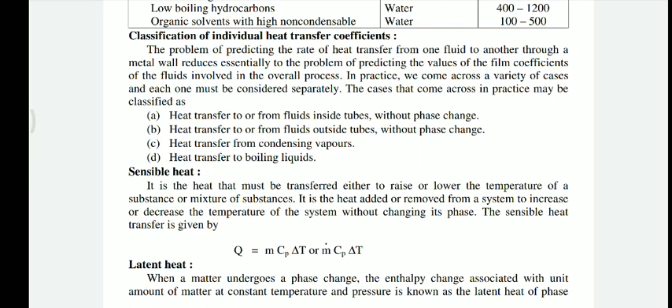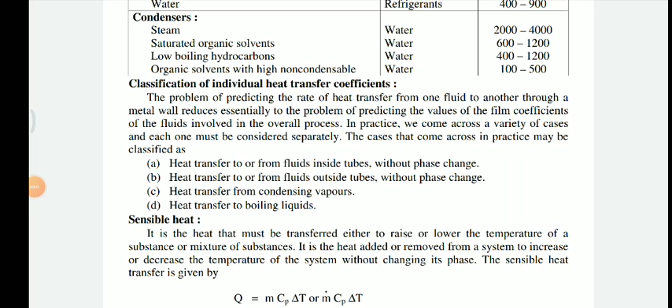In the previous lecture of heat transfer, we discussed the classification of individual heat transfer coefficients. They are classified as: heat transfer to or from fluid inside a tube without phase change, heat transfer to or from fluid flowing outside a tube without phase change, heat transfer from condensing vapors, and heat transfer to boiling liquids.

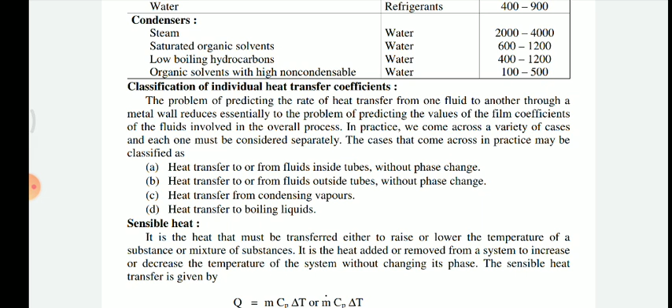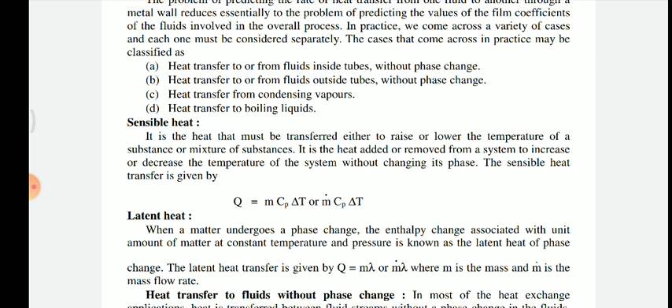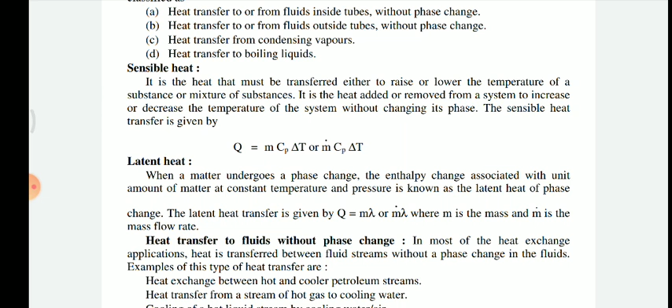It is heat added or removed from a system to increase or decrease the temperature of the system without changing its phase. It is one type of process where heat is supplied either to increase or decrease temperature without phase change, meaning the process or component does not undergo a phase change.

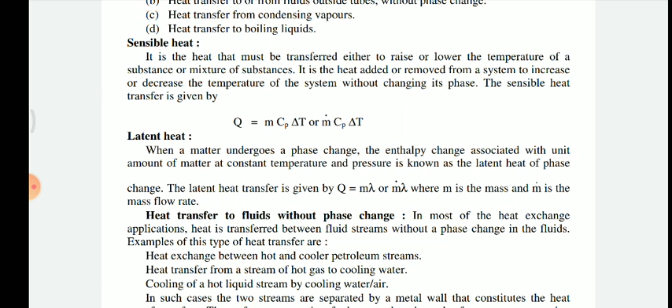So the sensible heat transfer is given by: Q equals m Cp delta T, or Q equals m dot Cp delta T, where sensible heat can be written as mCp delta T.

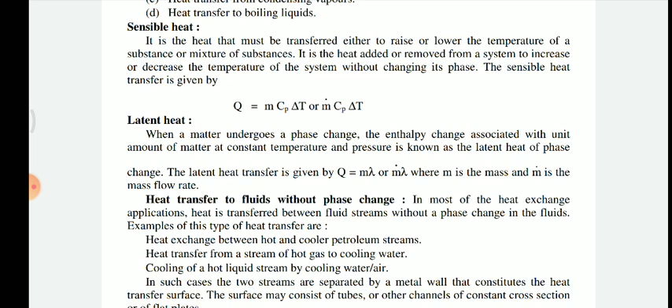And the latent heat transfer is given by Q equals m lambda, or Q equals m dot lambda, where m indicates the mass and m dot indicates the mass flow rate.

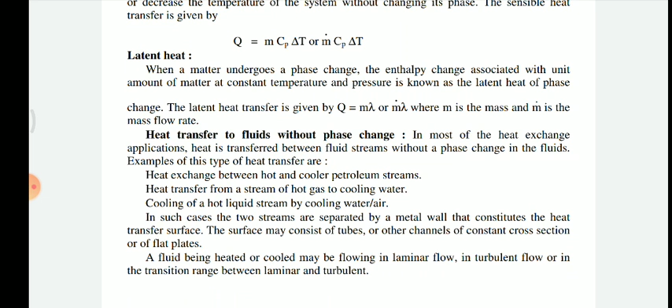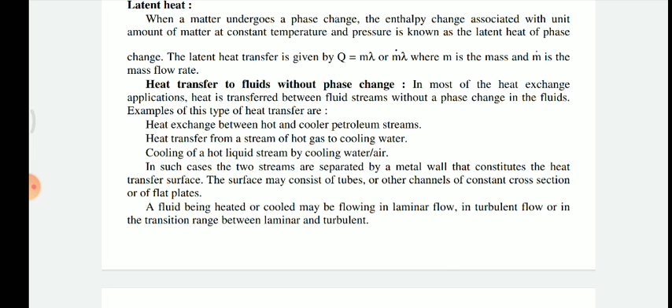Next is heat transfer to fluid without phase change. In most heat exchanger applications, heat is transferred between fluid streams without a phase change in the fluid. In most heat exchangers, the heat transfer occurring is without phase change - for example with water or liquid, at the end of the process it remains in the form of liquid only. It does not convert to gaseous form; if it is liquid, it remains liquid.

The example of this type of heat transfer: in most heat exchanger applications, heat is transferred between fluid streams without a phase change occurring between the fluid streams. Examples of these types of heat transfer are: first, heat exchange between hot and cooler petroleum streams - the heat transfer occurring between hot and cold petroleum streams happens in this way.

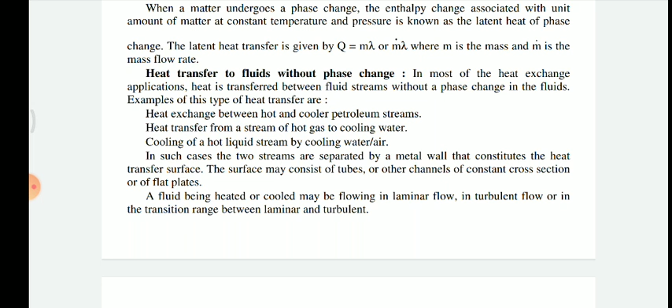Then, heat transfer from a stream of hot gas to cooling water - when heat transfer occurs into the cooling water.

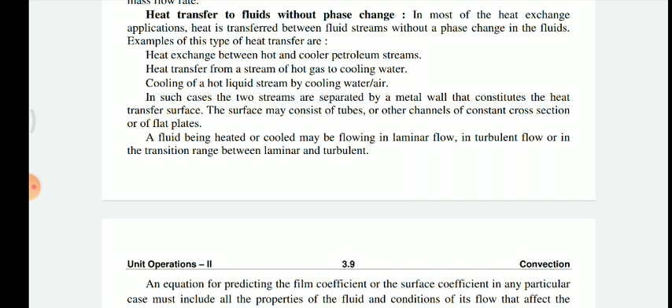So the second type is heat transfer from a stream of hot gas to cooling water. In such cases, the two streams are separated by a metal wall that constitutes the heat transfer surface.

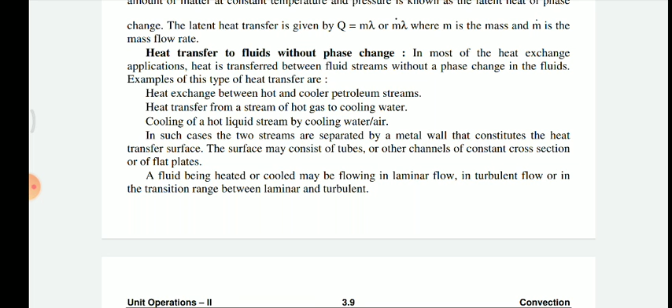Or other channel of constant cross section, or a flat plate. So a fluid being heated or cooled may be flowing in laminar or turbulent flow, or in the transition range between laminar and turbulent.

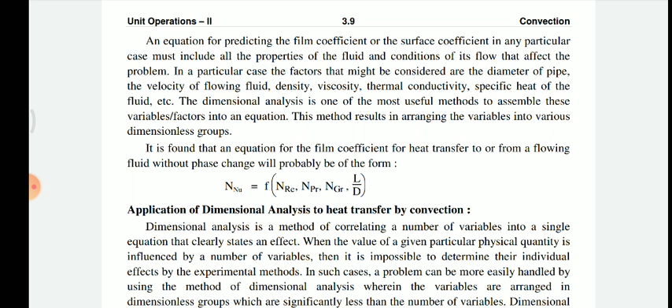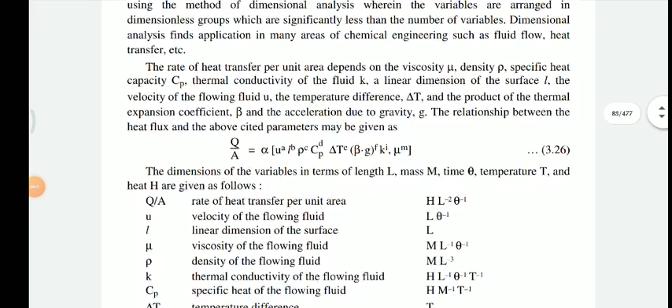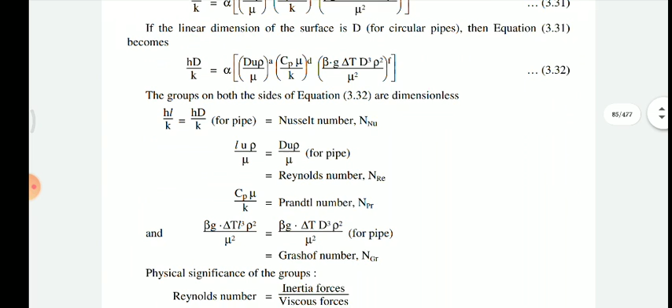Nusselt number is given here as HL by K, is equal to HD by K for a pipe, is equal to the Nusselt number, NU.

Then it is the Nusselt number, and second is Reynolds number, du rho by mu.

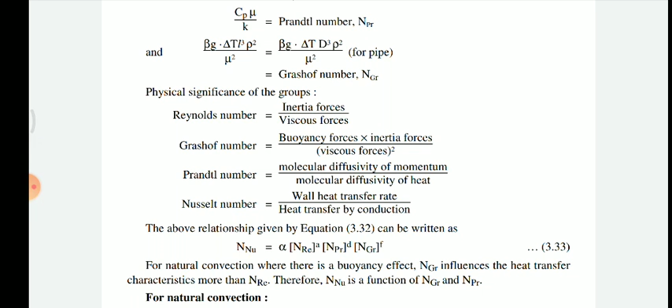The next one is Prandtl number. Prandtl number is given by molecular diffusivity of momentum divided by molecular diffusivity of heat.

And Nusselt number is given by wall heat transfer rate divided by heat transfer by conduction.

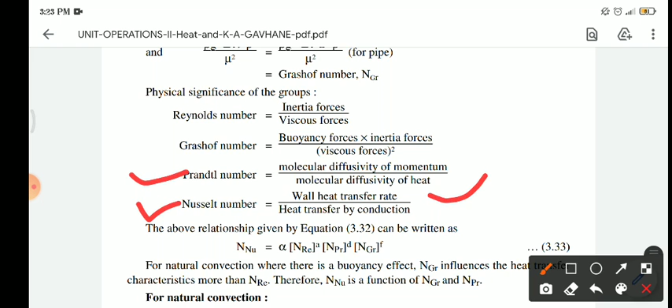The above relationship is given by equation 3.32, and it can be written as Nusselt number, N of Nu, is given by alpha of Reynolds number raised to a, and Prandtl number raised to d, and Grashof number raised to f.

That means the Nusselt number is the relationship between the Reynolds number, Prandtl number, and Grashof number. And for natural convection,

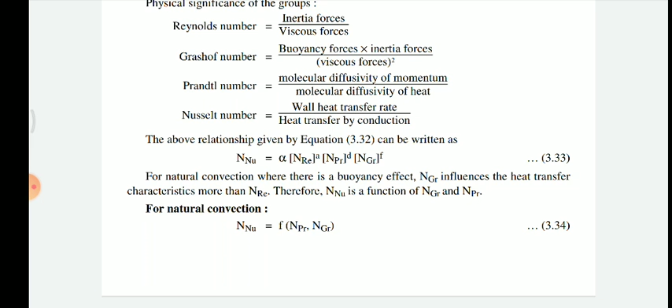where a buoyancy effect, N of Gr, influences the heat transfer characteristic more than N of Re, therefore N of Nu is a function of N of Gr and N of Pr.

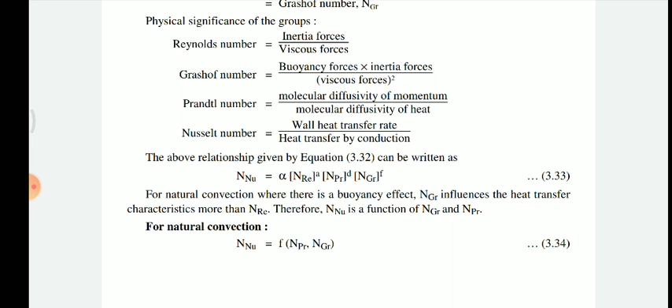Meaning, Nusselt number is the function of Reynolds number, Prandtl number, and Grashof number. And for natural convection, Nusselt number is a function of only the Grashof number and Prandtl number.

So for free convection, and for forced convection, Reynolds number influences the heat transfer characteristic and Grashof number may be omitted.

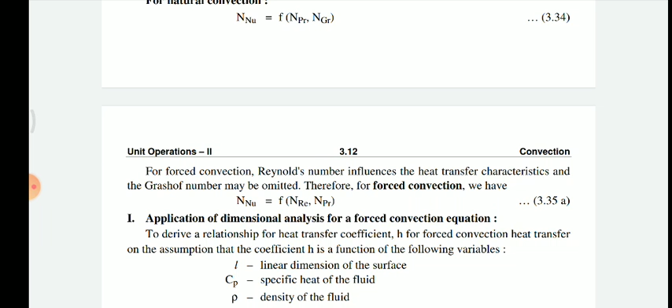So therefore for forced convection, we have N of Nusselt as a function of Reynolds number and Prandtl number.

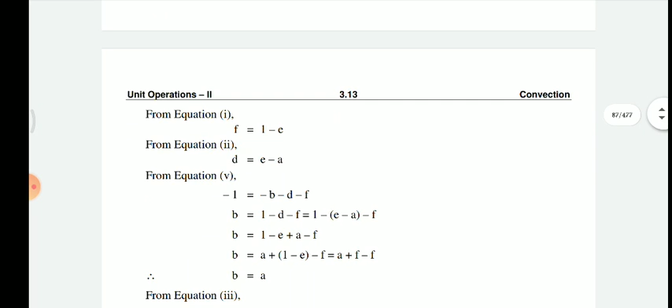So these are the important theorems which are used for the various dimensionless numbers.

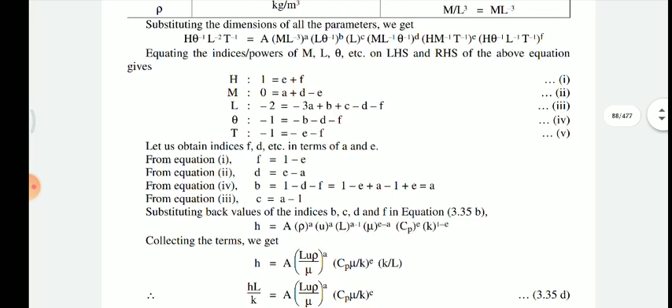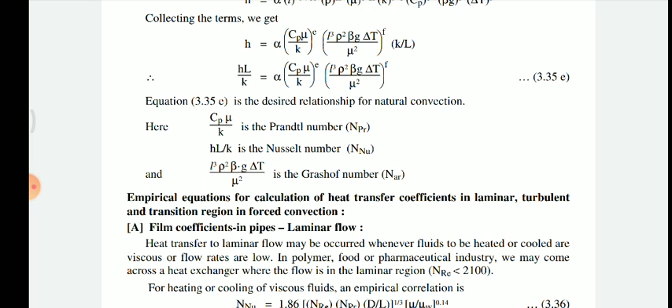So Prandtl number is indicated by Cp mu by k, Nusselt number by HL by k, and Grashof number is given by L cube rho square beta g delta t upon mu square.

Now the empirical equation. Next theorem is based upon the empirical equation. And what should be the empirical equation?

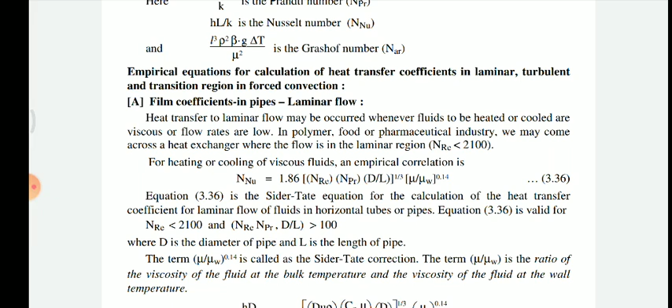Empirical equation for calculation of heat transfer coefficient in laminar, turbulent and transition region in forced convection. So in forced convection, the empirical equation can be written as the empirical equation for film coefficient in laminar pipe flow.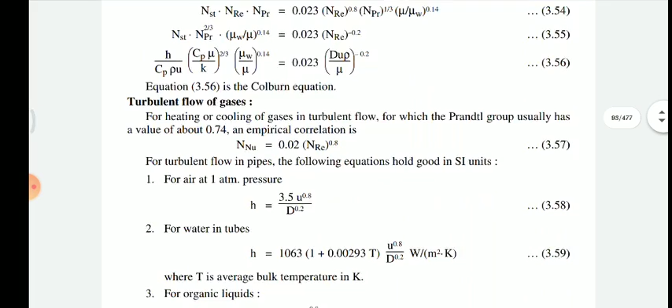Then next is film coefficient for pipe in turbulent flow, and then turbulent flow of gases and flow in non-circular cross sections, and the Colburn analogy and Colburn J factor.

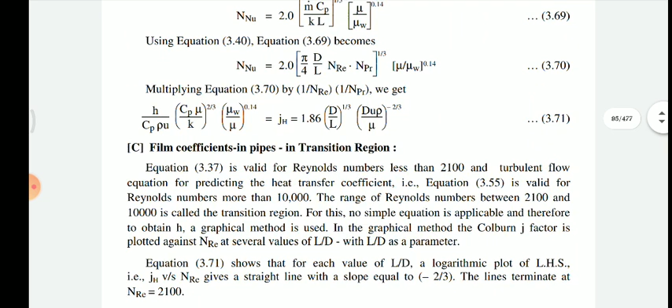Then after that, film coefficient in pipe in transition regions.

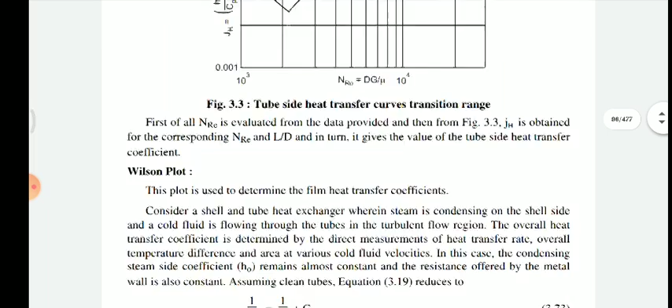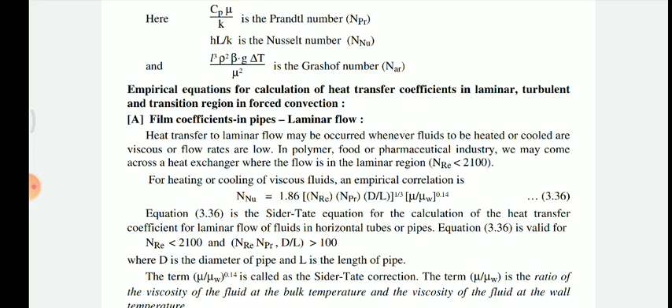So first, film coefficient in pipe for laminar flow is most important for the GTU examination, and this question is repeatedly asked in the question paper. So you must be prepared, and this equation is also known as the Sieder-Tate equation.

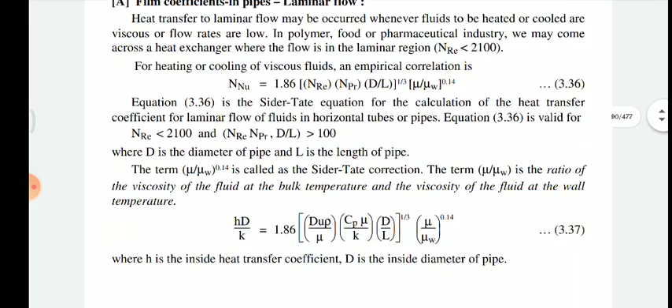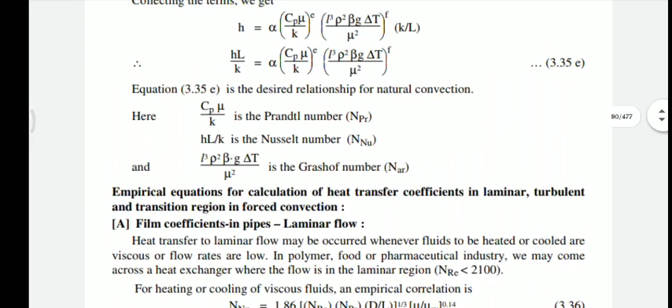Correction equation, and the Sieder-Tate equation, as well as this will be the laminar flow equation.